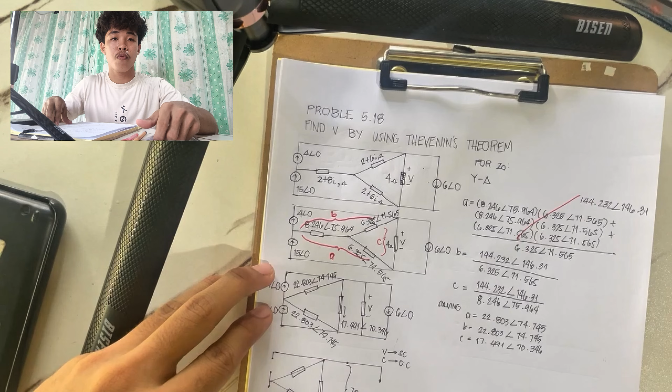Hello everyone, my name is Gister Nico Muniz and today we are going to solve for an AC circuit using Thevenin's theorem. We are assigned to find V by using Thevenin's theorem.

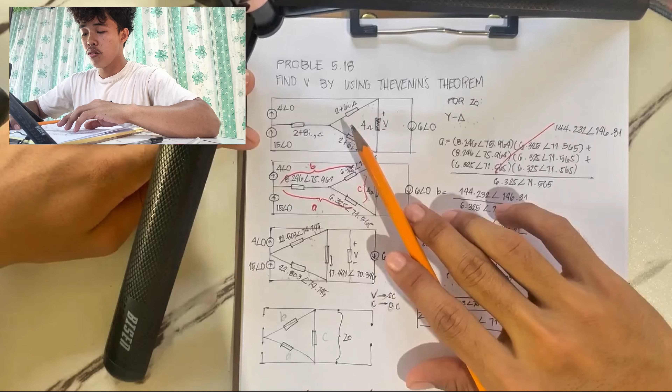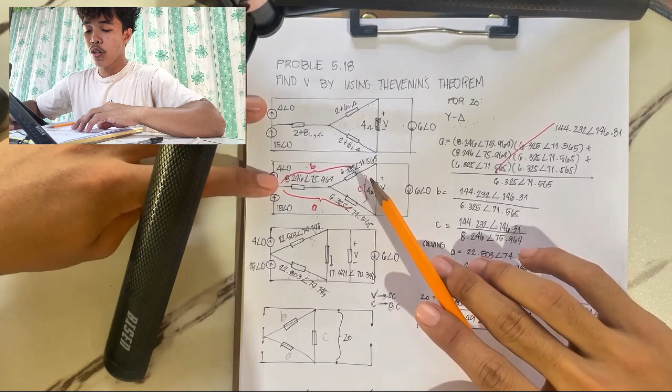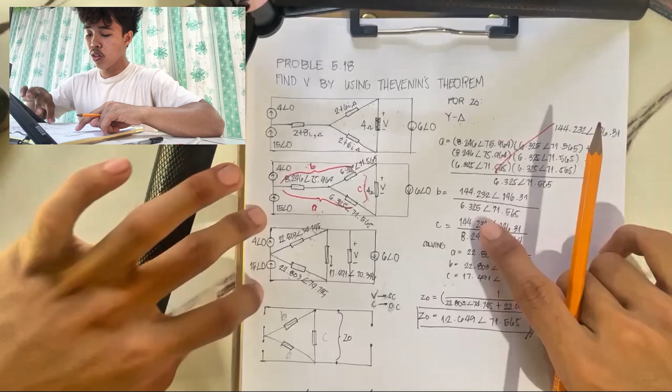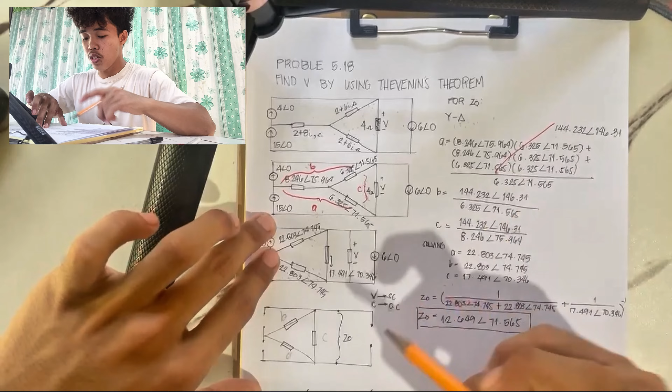So using the rules for the Y to delta transformation, we can get for the leg A, B, and C. After getting that leg A, B, C, we can redraw it into this delta circuit. So after transforming this, we can now solve for ZO. For solving ZO, voltage is short circuit and current is open circuit. So these three sources are now open circuit. Since there is no voltage, there is no short circuit.

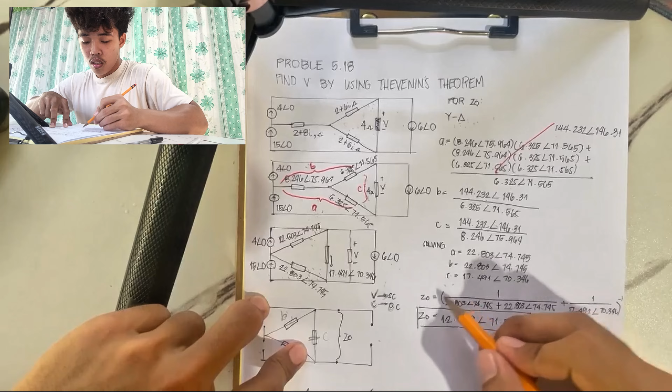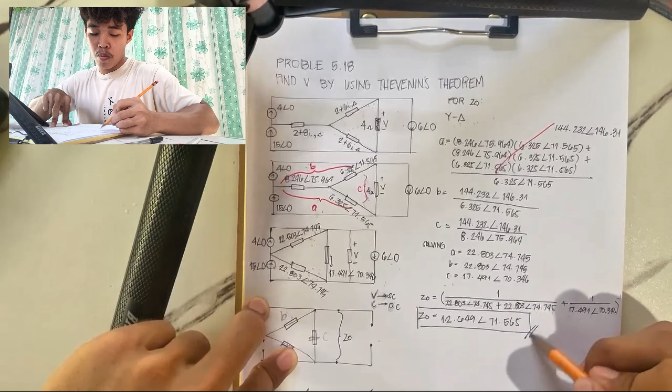So ZO is equal to 1 over 22.803 angle 74.745 plus 22.803 angle 74.745 plus 1 over 17.491 angle 70.346, raised to negative 1. ZO now is equal to 12.649 angle 71.565. After getting the looking back impedance, we can solve for the VO. The current here is equal to 4 angle 0. Then the current also here is 15 angle 0.

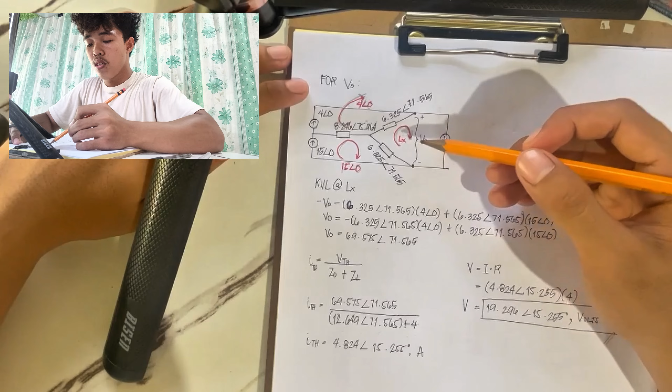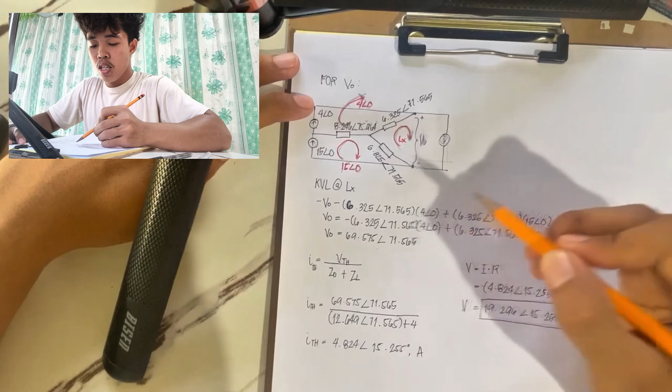So we are going to use KVL at loop X to find VO. Negative VO minus 6.325 angle 71.565 multiplied by 4 angle 0 plus 6.325 angle 71.565 multiplied by 15 angle 0 is equal to 0.

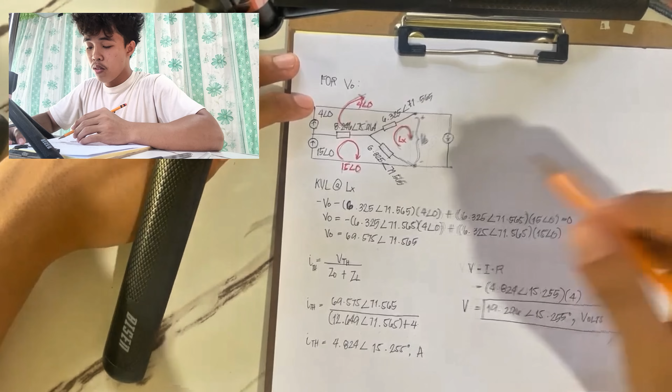So VO is equal to negative 6.325 angle 71.565 multiplied by 4 angle 0 plus 6.325 angle 71.565 multiplied by 15 angle 0. So VO now is equal to 69.575 angle 71.565. So after getting the VO and the looking back impedance, we can solve for the I Thevenin, which is I is equal to VTH over ZO plus ZL.

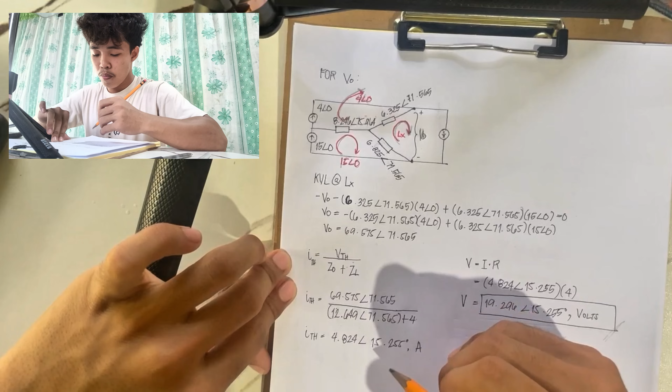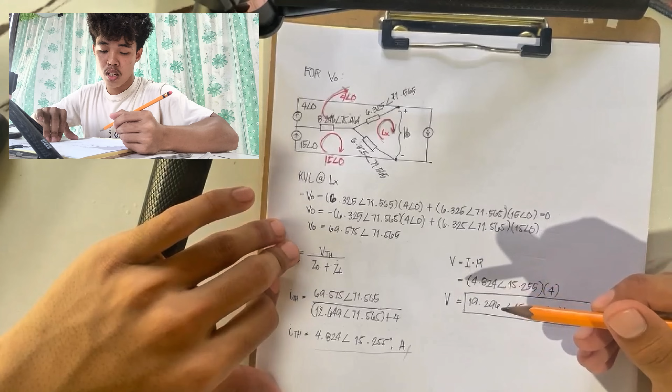So ITH now is equal to 69.575 angle 71.565 over 12.649 angle 71.565 plus 4. ITH now is equal to 4.824 angle 15.255 ampere. So using Ohm's law, we can now get for the V. V is equal to I times R. So V is equal to 4.824 angle 15.255 multiplied by 4. V now is equal to 19.296 angle 15.255 volts. So that's the final answer.